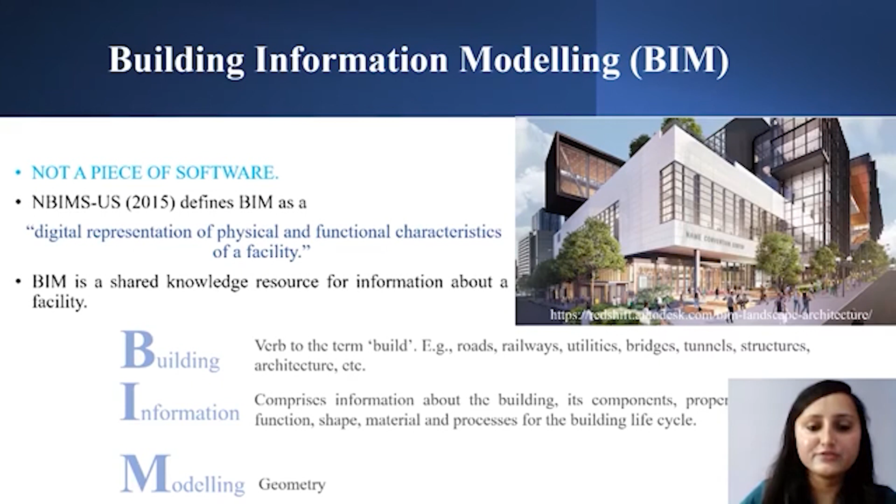It refers to the geometry of the building. BIM uses various softwares for the modeling part, for example, Revit, ArchiCAD, SketchUp, Navisworks, Civil 3D, Tekla, and many more.

In the construction industry, numerous problems and errors occur because there are certain flaws in the design phase. There are difficulties in communication of information and coordination among the participants of a project. We can say there is a separation in the design phase and the construction phase. Apart from these problems, there are several other problems that exist in the construction industry. A lot of such kind of problems can be solved if design information is communicated effectively.

This is where BIM comes in. If we see in the current scenario, the architectural, engineering and construction projects are becoming more and more complex because of global trends and advancement in technology. Since technology is also advancing, it is helping industry professionals to work efficiently and effectively. Example of such advancing technology is BIM. It can play a vital role here.

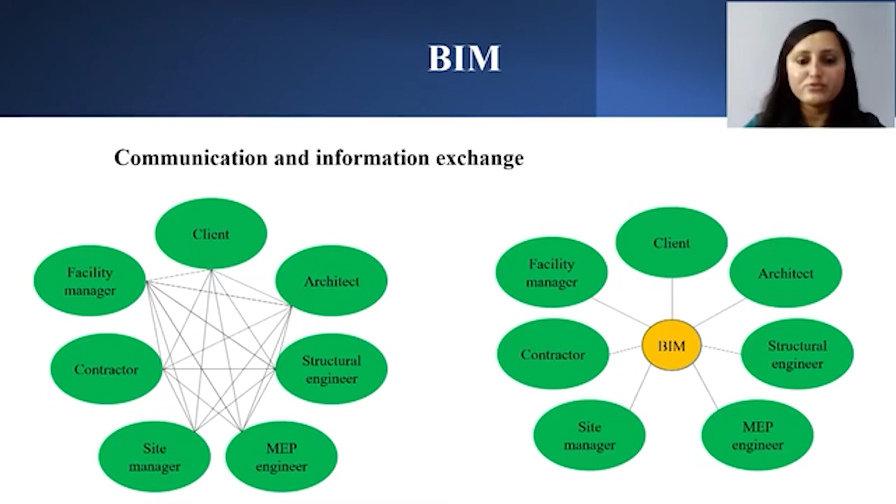Whereas on the right hand side, the picture shows communication with the help of BIM, and it looks quite easy to understand. In such case, the BIM model serves as a database where information from all the stakeholders can be put in, and each can access the information provided by other stakeholders. So this is a good, effective way to communicate and exchange information.

If we talk about the design process, it has evolved with time. Initially, the design process was carried out by hand drafting. It was an extremely time-consuming process. If changes were to be made in the drawings in any of the components, then it required a lot of rework to make the changes. It means that the chances for errors and omissions were pretty high.

With the advent of CAD, a shift was made from hand drafting to CAD. With CAD, industry professionals started drawing on computers and viewed their drawings on monitors. Although CAD replaced hand drafting, it did not change the way information was displayed in a significant manner. Just like in case of hand drafting, there used to be numerous drawing documents for a single structure. For the CAD drawing also, the same situation was there. But CAD had an advantage over this, that it was less time consuming and also errors and omissions were lesser.

Till this date, many professionals are still using CAD drawings. With the digital transformation, BIM has now come up in the industry, and owing to its numerous advantages, it is becoming the future of the AEC industry. Unlike hand drafting and CAD drawing, there is a single model for a single structure, and all the related information is linked into a single model.

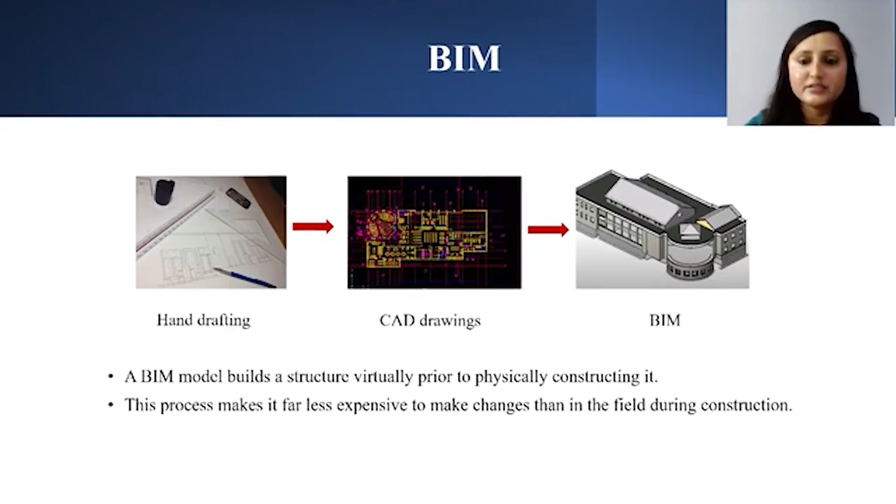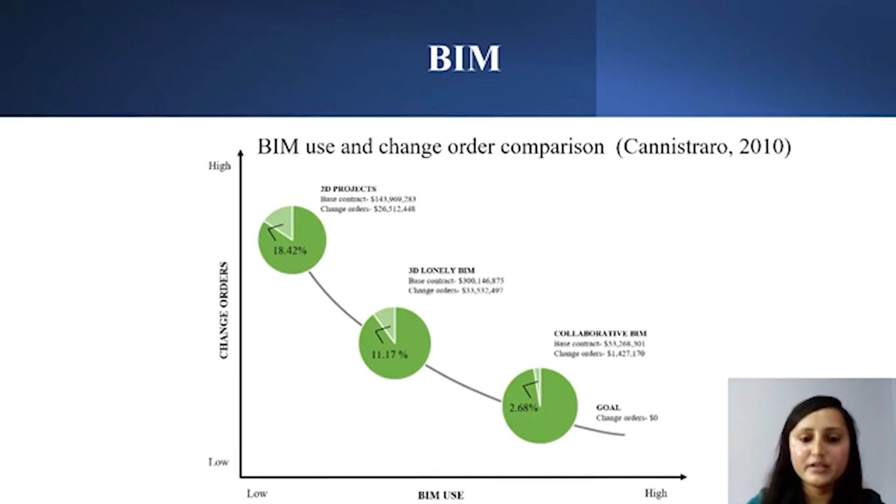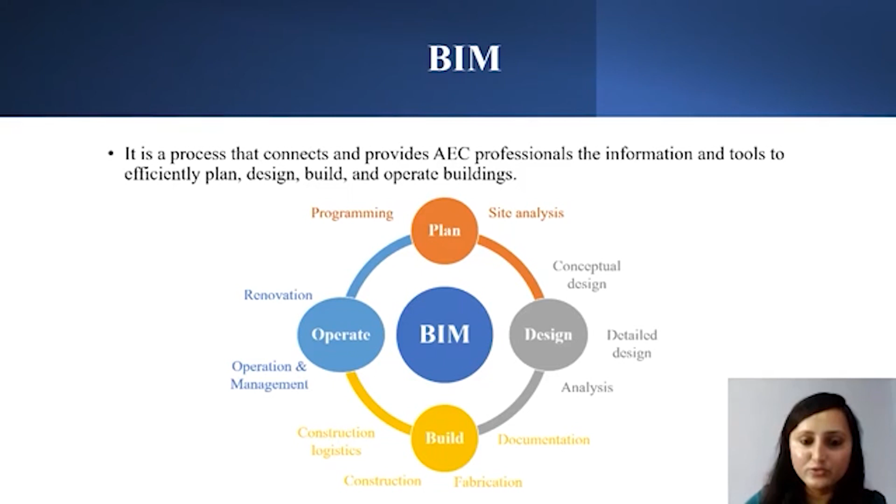Till now, we have understood what is BIM, but there is a question: why use BIM? Construction professionals are using 2D drawings to deliver their projects and they are comfortable doing so. So why shift from 2D to 3D?

In 2D drawings, there are different drawings for a single model. For example, architectural drawing is in a different document. Similarly, structural drawings are different, MEP drawings are different, and so on. Whereas in case of BIM, within a single model, we can integrate all these aspects together. Other than this, we can integrate time, cost, perform energy analysis of the buildings, and also do safety management.

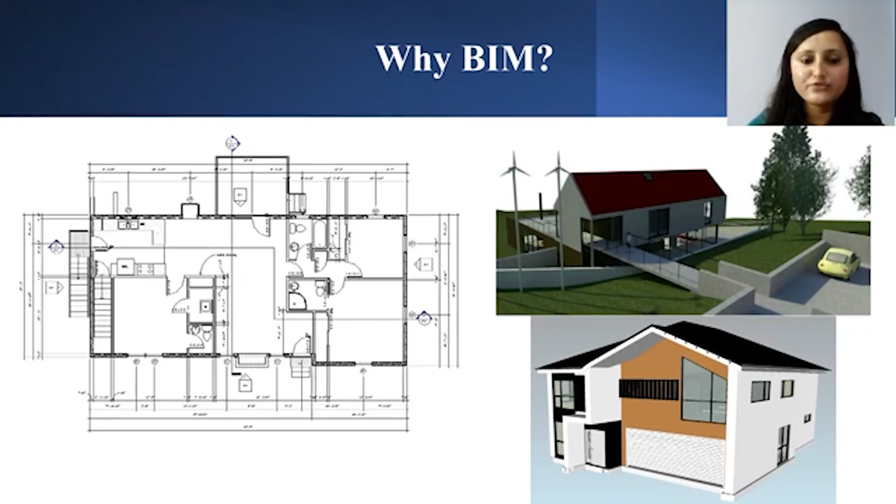There is better communication among stakeholders in case of BIM. Everybody can see the BIM model, so everybody knows what is happening in the project. Whereas in case of 2D drawings, everybody works on their own, so the communication is not as effective and the chances of rework are more than in the 3D model.

Now comes the difference between traditional versus BIM safety management. As we have already studied in the previous lectures, safety planning is an integral part of the construction planning process. It involves identification of all potential hazards and accordingly deciding the safety measures. If safety planning is done effectively and efficiently, it leads to the prevention of accidents.

Traditionally, safety planning relies on manual observation and the experience of the safety planner to detect potential hazards. Such planning requires manual efforts, is time consuming, and is also considered error prone. Traditional safety planning is based on 2D drawings and schedules to understand the needs for safety equipment on a construction site. It is very difficult to identify potential hazards because 2D drawings are static.

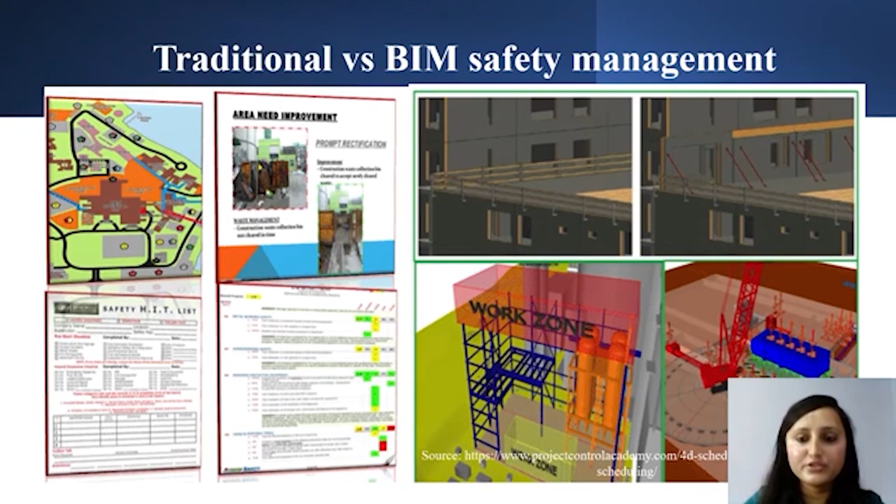BIM, on the other side, helps constructors to visualize site conditions, recognize hazards, and eliminate or reduce them before construction starts. Now comes BIM for safety. It is desirable to have a technology which may help in analyzing and communicating safety related issues.

In recent years, due to the growing application of BIM in the construction industry, researchers as well as industry professionals have started using BIM to enhance construction safety. As BIM shows a visual representation of a facility, a BIM model allows constructors to visually assess job site conditions and recognize hazards. This visual model allows construction teams to assess site conditions and identify unsafe areas that might otherwise remain unnoticed until the construction team is on site.

BIM can improve safety by identifying potential hazards in a virtual environment before the construction starts. It not only identifies the hazard but also helps analyze why it happened. The potential hazards can be exposed floor penetrations, unprotected edges, exposure to equipment, etc. In this way, BIM connects safety-related issues more closely to the construction planning process, providing methods to manage and visualize up-to-date plans and site information.

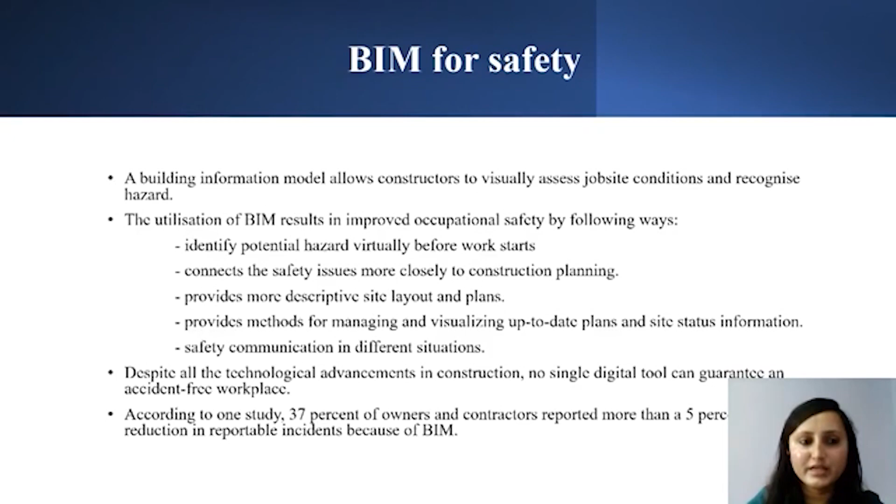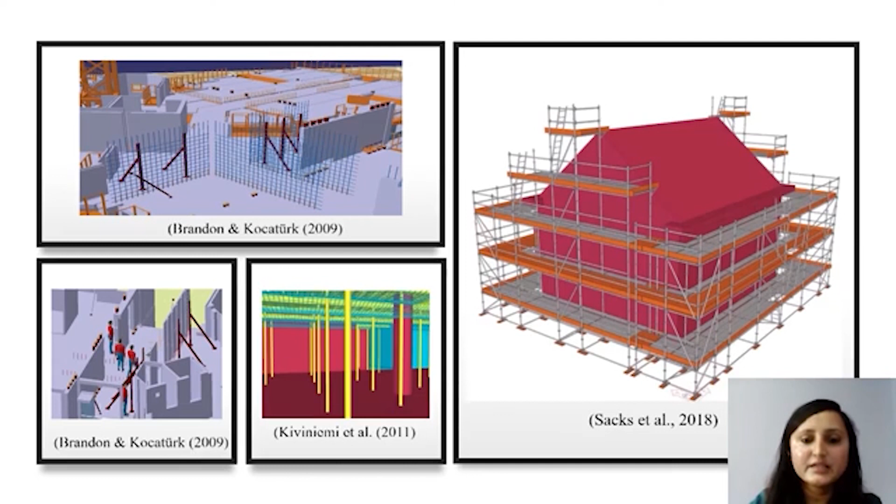Here are a few pictures to show how we can visualize the site conditions using BIM. The first picture shows the reinforcement fixing process. The other picture shows the movement of workers on site. The other one shows safety nets for concrete casting formwork, and the last picture shows a model presenting scaffolds on a building. Like this, we can create different scenarios and visualize them in a virtual environment and plan for safety accordingly.

Now comes how BIM can improve safety in construction. For this, I have divided it into 5 categories, namely safety planning, safety training and education, prefabrication, design for safety, and automatic safety checking. In the further slides, we will be discussing them one by one.

Now let us start with safety planning. How can BIM help in safety planning? So far, we have discussed that BIM-based safety planning is useful in identifying hazards and communicating the safety plans to workers. 3D BIM modeling helps in identifying and correcting errors that may lead to hazards earlier in the pre-construction phase.

But the site conditions at the construction site keep on changing. Therefore, 3D modeling may not be that helpful. In such case, 4D BIM helps. 4D BIM means we integrate the schedule data into the 3D model so that safety is planned and monitored as the construction work progresses. 4D BIM is important for safety planning as it enables the visualization of safety arrangements at different times and provides more illustrative safety plans.

4D BIM model can be utilized in the design phase as well as the construction phase to detect workplace conflicts. The 4D model is generated in the design phase and can be used in safety planning for the site. A construction project has numerous tasks and each task has its own associated risks. BIM can focus on each individual task so that it becomes easier to identify the risks, arrange for safety measures, and complete the tasks efficiently and safely.

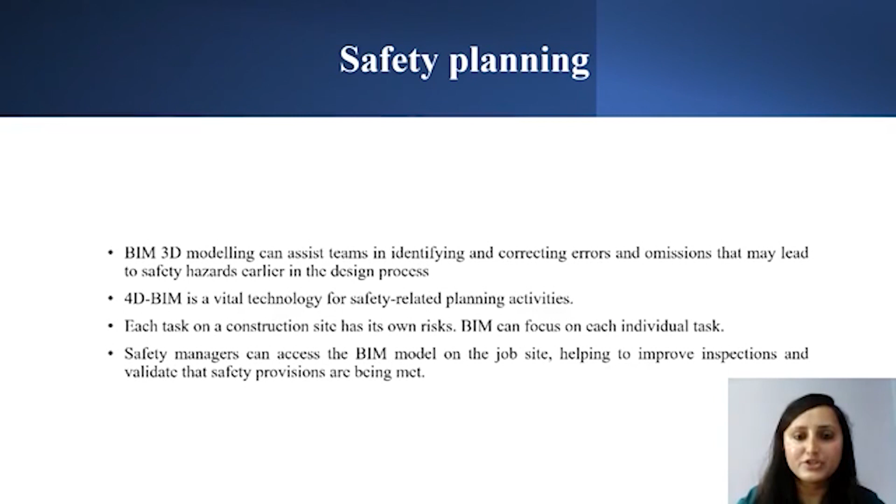During the construction stage, safety managers can access the BIM model and help in inspections and validate whether safety provisions are being met or not.

Here are the pictures to show the safety plans in a BIM model. The first picture shows the simulation of fire escape. These red markings show the fire escape plan. The second picture shows a model of a fall protection system. It shows the protection plan of edges

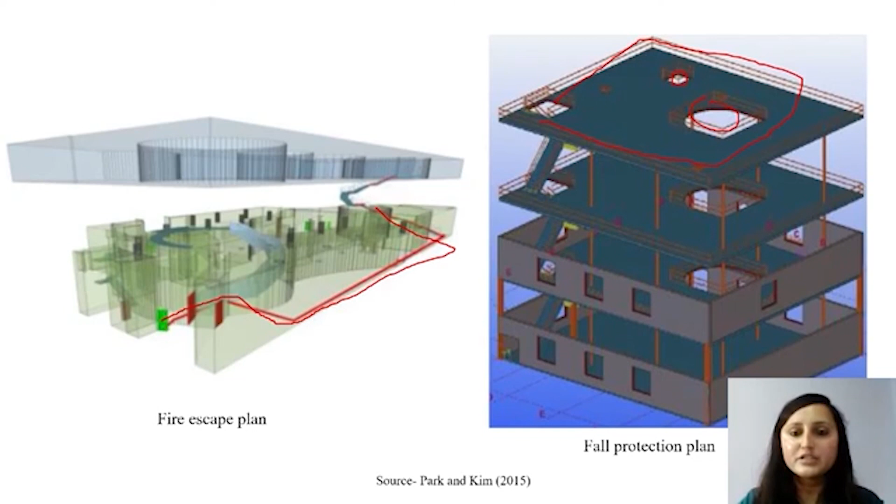and the floor penetration. Using 4D modeling, this fall protection can be installed whenever it is required and removed when it is not required. Such modeling can help in planning for safety prior to the construction. And similar to these scenarios, we can model for different scenarios to plan for safety.

Now let us discuss how BIM can help in safety training and education. Any tool that supports safety training and education and reveals unsafe conditions is of great value to the construction team. BIM has shown its abilities to provide training for workers off-site by increasing their awareness about the hazards by visualization of various facilities such as scaffoldings, guardrails, etc.

A person's ability to understand abstract concepts can be enhanced with the help of visualization. Visualization or animation is an effective method for understanding safety-related issues. This is important especially for new workers at site who are unaware of the site safety measures. With the help of BIM, such new workers can understand the construction processes in a better way.

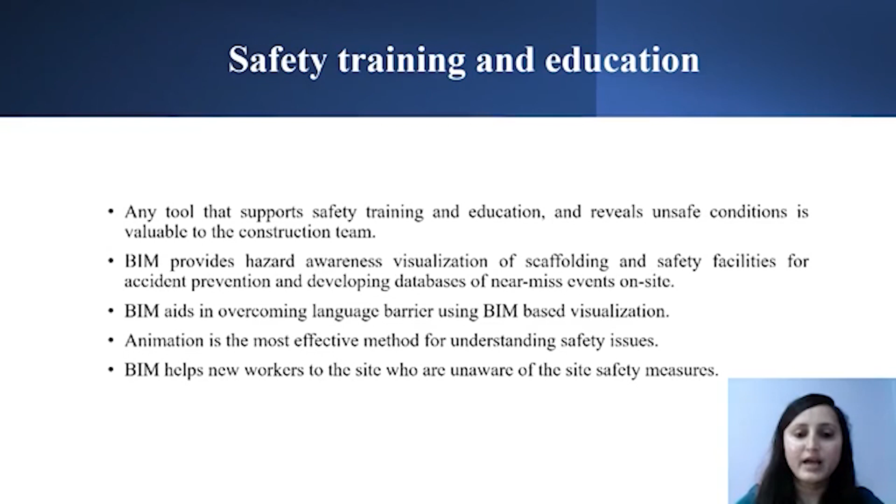Another thing is the language barrier. At construction sites, there are many migrant workers present who come from different places with different languages. They may or may not understand the language of the place where they are working. In such case, providing safety training is difficult, but BIM helps in overcoming this language barrier as visualization can help them understand all the related issues and processes.

Now let us discuss prefabrication. When we move our work to a warehouse environment, it greatly reduces the risks of hazards such as slips, trips, falls, and other injuries. BIM and prefabrication has led to many favorable scenarios that help in reducing the risk.

BIM helps in automating the work on site, which leads to safer projects. We can simply say that reducing the amount of man hours on site reduces the chances of incidents happening on site. A construction company claims that BIM-enabled prefabrication has allowed them to eliminate thousands of trips climbing up ladders and lifts, and also to eliminate thousands of hours of hot work and general construction activities in various situations.

While prefabrication seems a perfect solution, it can cause more damage than good if not utilized in a correct manner. This is where BIM helps.

BIM helps in designing the prefabricated material effectively. There's a risk of whether parts of the prefabricated material will fit together on site or not, and this risk is resolved by BIM, as the BIM model is highly detailed and consists of each and every bit of information.

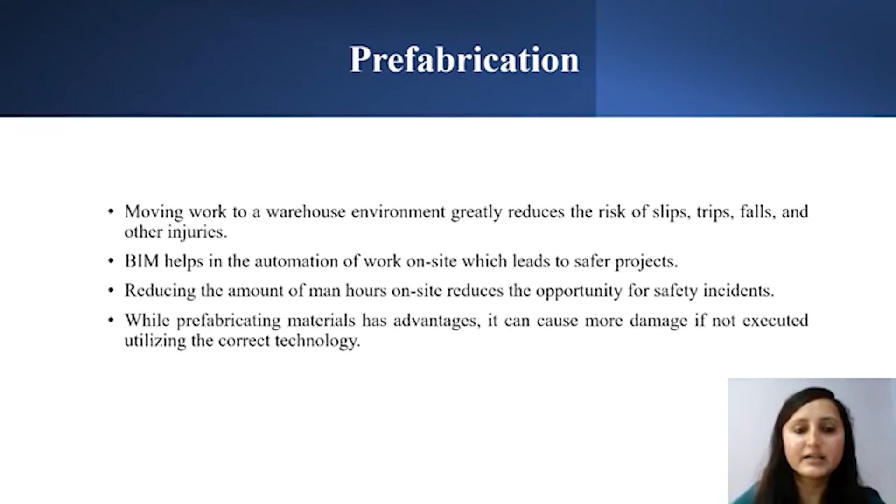Next is design for safety, or prevention through design. We've already discussed DFS earlier, so we know that design for safety is the process where engineers and architects consider safety during the design phase. Potential hazards and risks are designed out in the design phase itself.

Researchers have established that there exists a relationship between design and accidents. Usually accidents occur during the construction phase, and improper safety planning is the major contributing factor. Many researchers have focused on the design and planning stage of the project, which shows the efficacy of BIM in preventing accidents through design.

BIM helps in providing safety suggestions to designers, engineers, and constructors. When the information is acquired earlier in the project lifecycle, it allows the teams to become aware of the issues and address them at earlier stages.

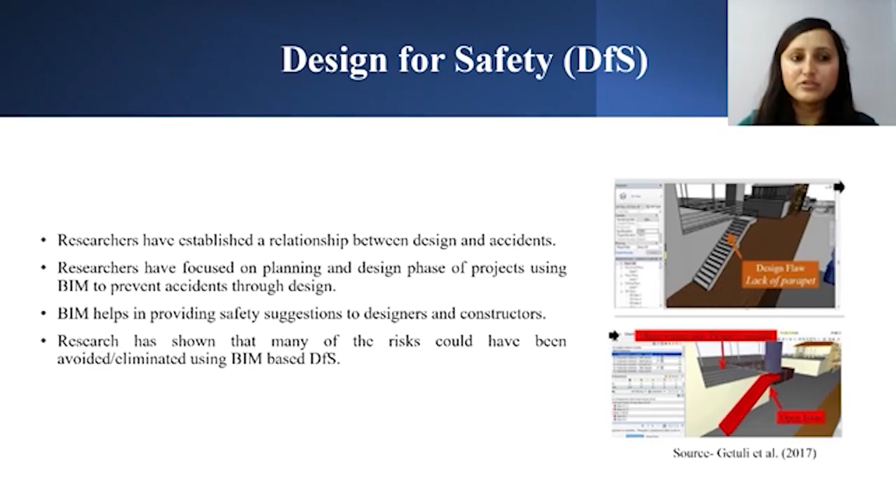As seen in the picture, safety suggestions are made available using BIM. There is a staircase component which has been highlighted, and there is an issue regarding a flaw in the design made available, that there is no parapet in the staircase. Similarly, we can identify such design flaws using BIM modeling.

Last but not the least is automatic safety checking, also referred to as automated rule-based checking or automated code compliance checking. As the term indicates, it has something to do with rules or codes. In simple terms, it is a process to automate and check against a set of rules.

It is defined as a computational procedure for addressing the manual regulation verification problem in a finite number of computable steps. It means that the safety rules and regulations which we have in a human readable format are converted into a computer readable format.

It is a piece of software which does not modify a building design, but evaluates that building design to check whether it follows the set rules or not. It assists the user to define and apply rules into the model and get reports in return.

The results generated are in the form of pass if the rules are conformed to, fail, warning, or unknown if certain constraints are missing. BIM allows an environment where these codes and regulations can be verified automatically through software application, which otherwise would be done manually.

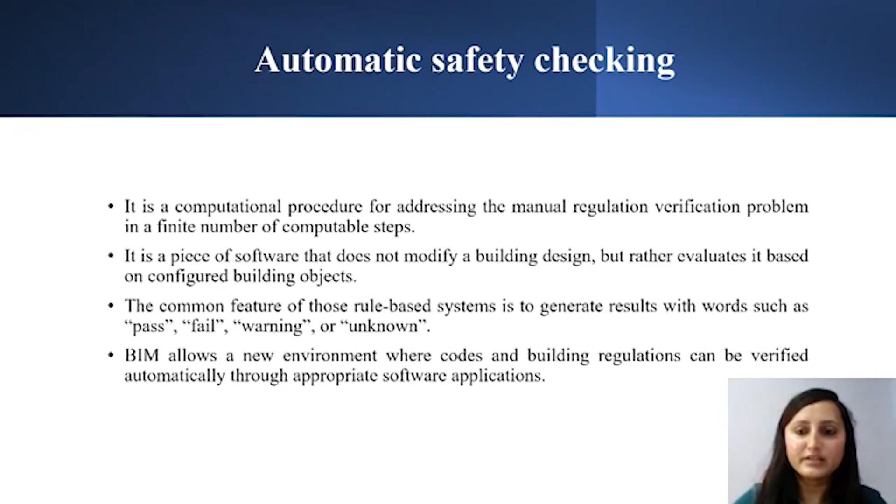There are four components of automatic safety checking. The first is rule interpretation, which involves translation of human readable safety regulations into computer readable form. The second is building model preparation, which involves building a model wherein we execute the converted rules.

The third is rule execution, where we apply the translated rules into the building model. The fourth is rule checking reporting, where we get our reports or results. There are two forms in which we can get results: visual forms in the model itself, or PDF or Excel based reports.

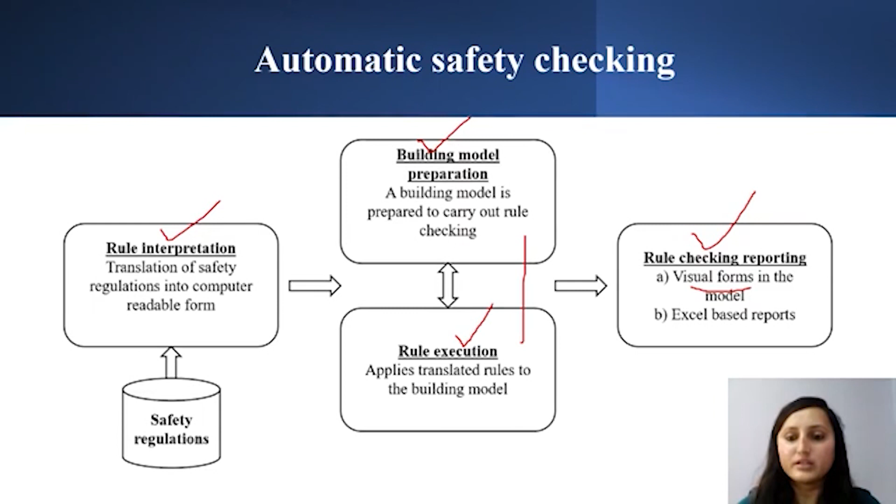That was all about how BIM helps enhance safety in construction sites. Now let us move on to some examples. BIM has been used by different construction companies to enhance safety within their organization. Some of them are listed here.

One organization used BIM as a tool for automated logistics and to prevent safety incidents. They used 3D BIM modeling to run through all construction and installation details before the construction team goes to the site.

Another organization found BIM to be an effective way to eliminate risk to welders. They used BIM to detail concrete and steel so that they could cast embeds and attached beams four levels up, in such a way that workers need not go up an elevator shaft and weld it.

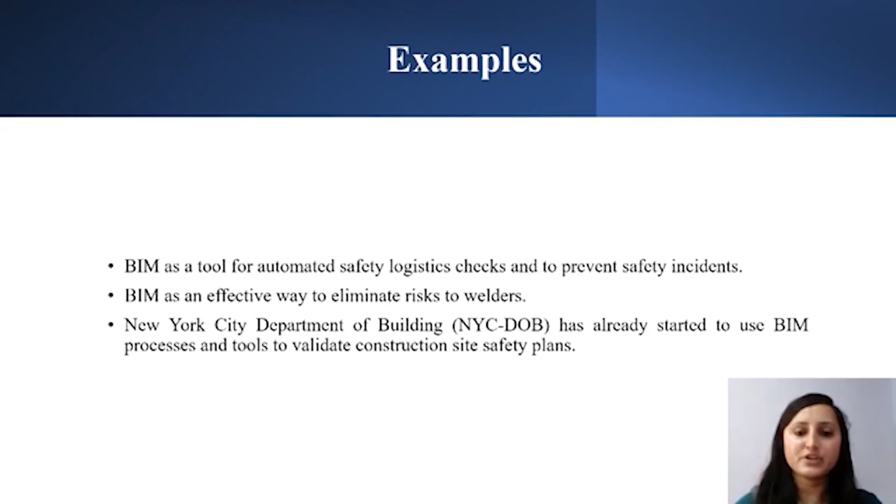The New York City Department of Building has started to use BIM processes and tools to validate construction site safety plans. The submission process of the safety plans, amendment, and review is now fully digitalized and BIM based. Like this, there are several construction companies who have been using BIM to enhance safety.